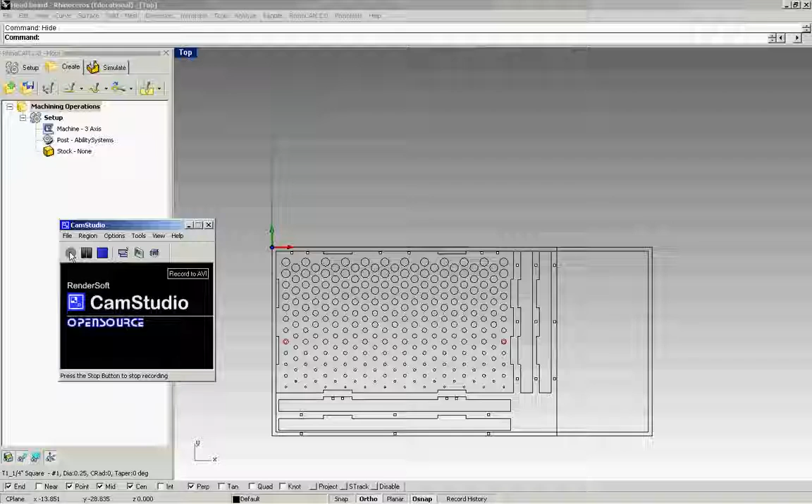Welcome to dFab tutorials. This is RhinoCAM2 and we're finishing up our three-part flip mill. In this segment we are going to finish off our flip mill with some profile cuts.

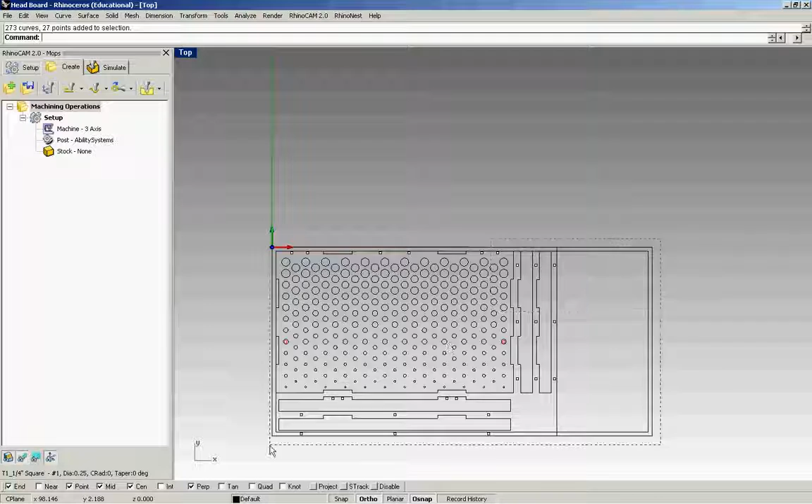So what I've done is I've taken my last piece here and I've created a new file so that I just have this to work with. So remember, we want the bottom left-hand corner of our material on the origin point. And what I've done is I've also added some sides to this so I can create a box from it. And since we've already taken care of the registration marks, I no longer need those.

And you can see that I have other points here as well, and these are going to be drill holes for screwing down my pieces. Just to explain a little bit of the nesting here, what I've done is I've created space in between profile cuts so I can create a frame around them, adding in the screw holes. Since I don't want screw holes on certain pieces, this strategy works best, and that'll prevent the pieces from kind of wiggling around when they're being cut.

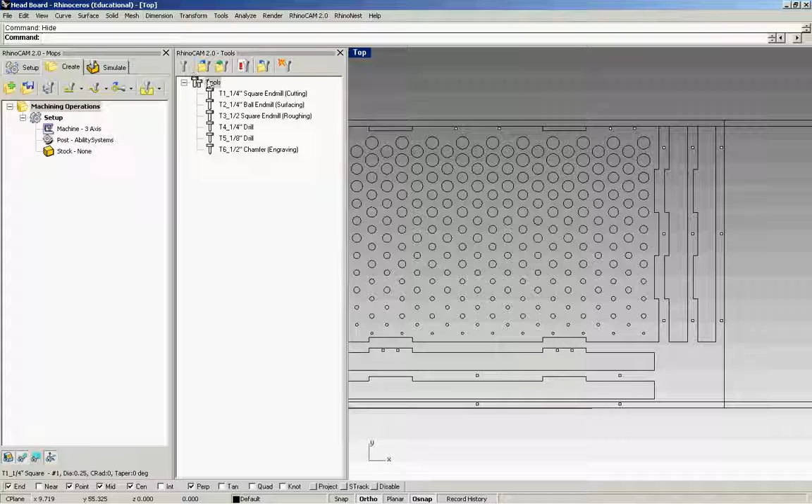So first, our tools are already loaded, and if you need to, go to RhinoCAM2 tool browser and you can load your tools with this icon. The first step I'm going to do is my drill holes. So I want to select all my holes, or my points. Go down to the drill icon and make sure that they are recognized. And again, we're going to use the 1/8 inch drill.

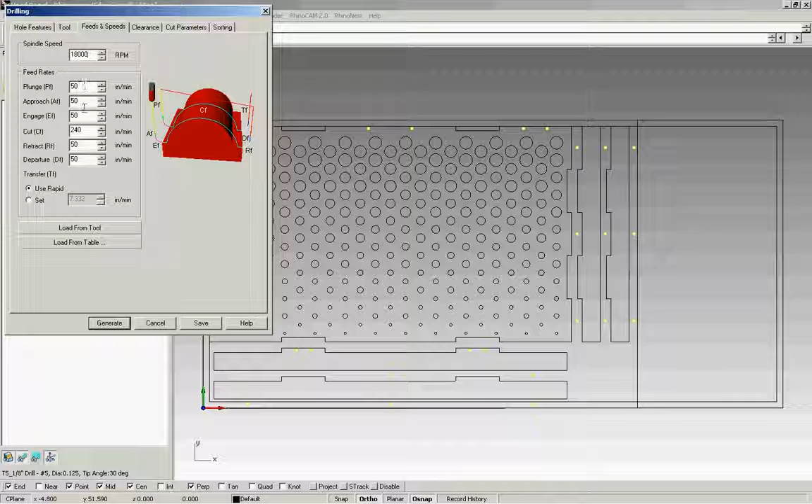And from the previous tutorial, we used 18,000 for RPM, everything else is 50, and the cut feed is 240. The Z value is going to be our material thickness, 0.75 plus a 1/2 inch. So that gives us this number, and we want to make sure clearance plane is checked.

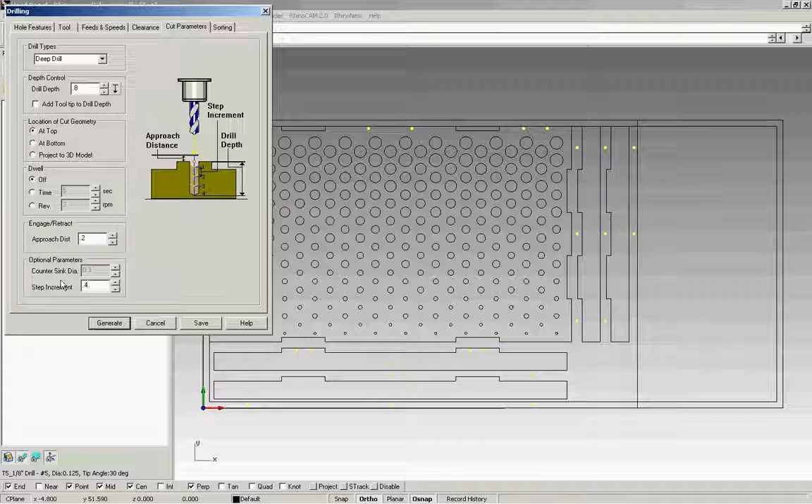For the 1/8 inch drill, I like to use deep drill setting, and we're going all the way through the material, so it's 0.75 plus a little bit extra, 0.05, and that ensures we get a clean hole. Again, approach distance is 0.2, and we're going to cut this in half and do 2 steps. Here I have a lot of points, a lot of holes, so this is going to really help on the sorting. And hit generate. You can see it's somewhat organized.

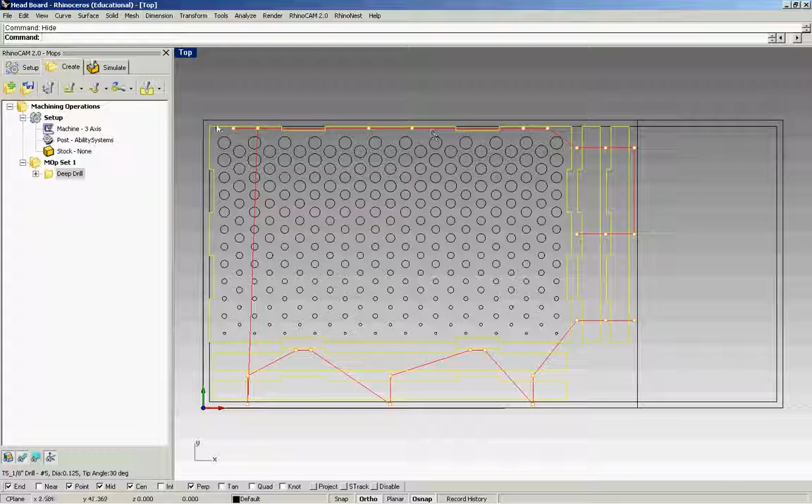Next would be to cut our profiles, first on the inside cuts. This is important because obviously we don't want to cut this outer edge first and then cut what's inside, because we might run the risk of it moving around a little bit. So for that, select your geometry, go back to 2.5 axis, and this time select profiling.

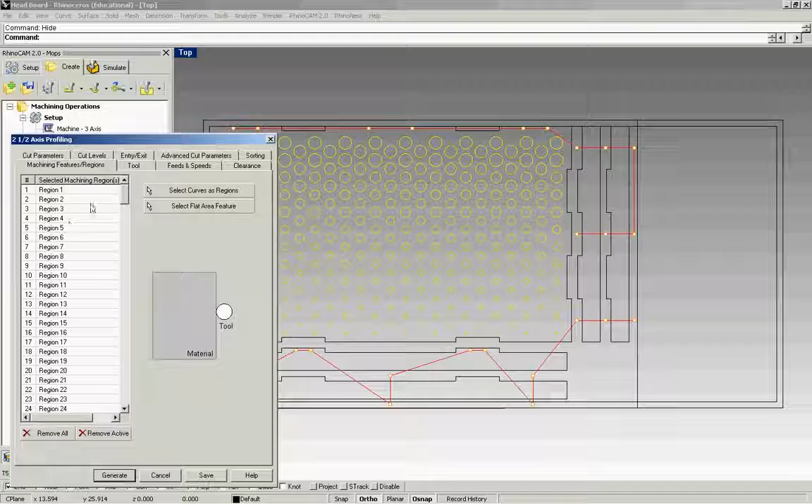Now we're breaking this up into 2 different operations because I have interior cuts, which are the ones highlighted, and then I have exterior cuts, which are the ones on the outside. So first we're going to do the inside cuts, and just make sure you have your regions selected. For this, again, the tool is going to be a 1/4 inch square end mill, and we use this tool for all our profiling.

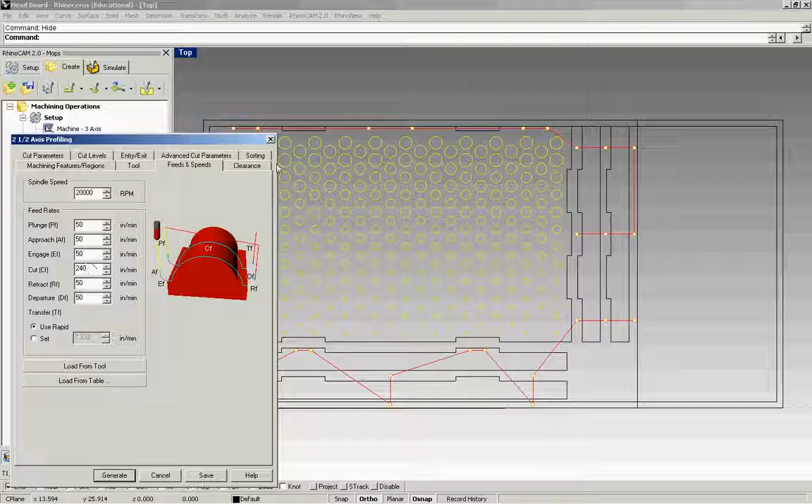We like to run this at 20,000, and everything is 50 except for the cut feed. Now I explained it previously, but again, this cut feed is while the bit is engaged into the material, this is how quickly it's running through it. So we're asking the machine to run the bit 240 inches per minute through the material. Clearance plane should stay the same from the previous setup.

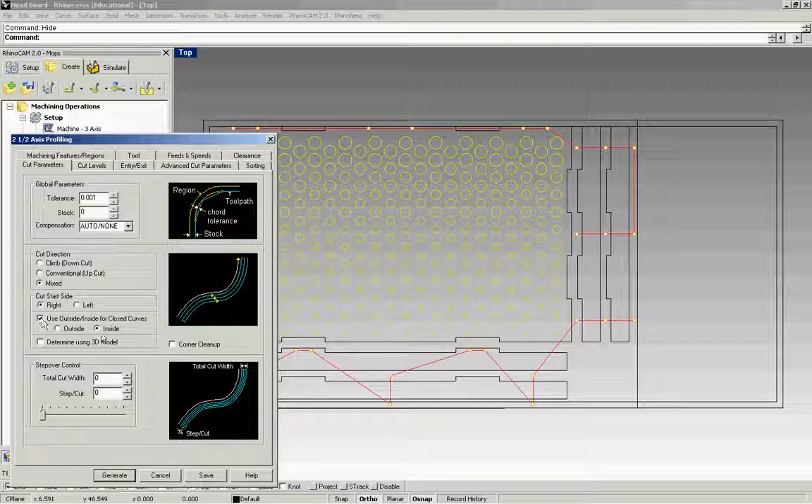In our cut parameters, this tolerance again is important, 1/1000th of an inch, and then our stock is set to 0. And we want a mixed cut direction, and this is important right here, outside inside cuts. We want to make sure that we check this box and bubble inside cuts. Cut levels, we are going all the way through the material. So your first cut, your total cut, is going to be 0.8.

And this will vary. If you're following the flip mill, this would actually be different, just for the fact that there's only 1/8 of an inch of material to cut here. But if you're watching this tutorial to learn how to profile, we're going to treat this as if we're profiling through the whole piece. Sorry if that sounds confusing. It's just a matter of changing our cut depth.

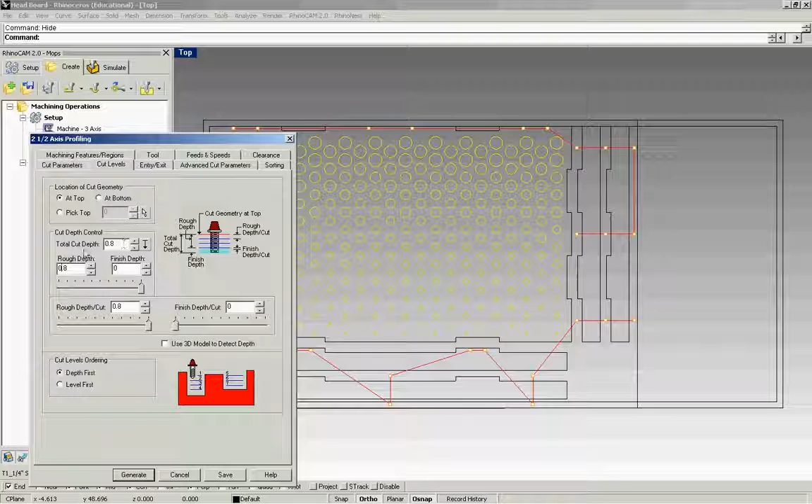So on a normal profiling, you'll want your cut depth to be the material thickness, which we'll do here, plus 0.05. And that's 0.8. And again, our rough depth is 0.375. And this utilizes the sweet spot on the compression bit, giving us a really clean edge. And then for the finishing depth, we like to break this number down a little bit further to ensure longevity of the bit. And just as long as it falls in between 0.1875 and 0.125, we're good to go.

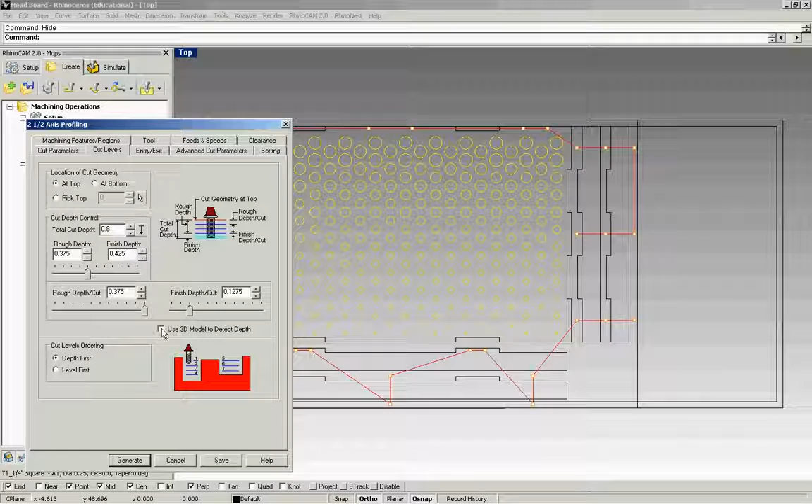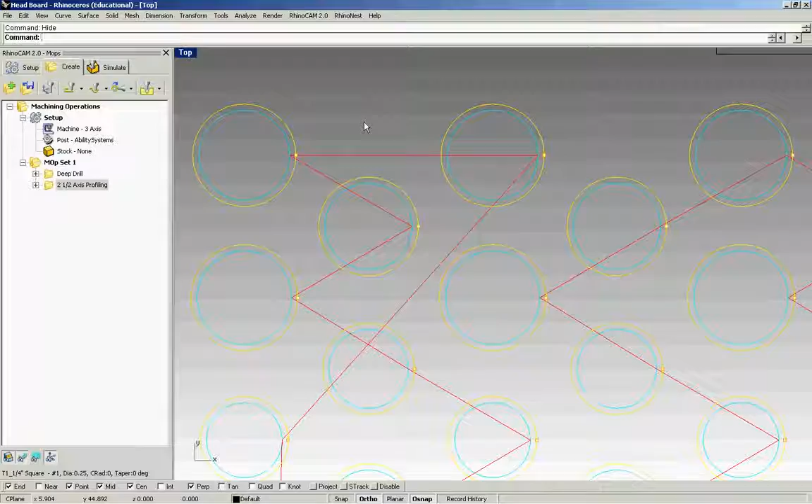So that works there. Make sure this is on depth first. This will save you time. And none on the entry exit. Don't worry about advanced cut parameters, and sorting, you want it on minimum distance. So we'll generate that. And if I zoom in, I see that my blue cut line is on the inside of my yellow geometry, and so we know we're good.

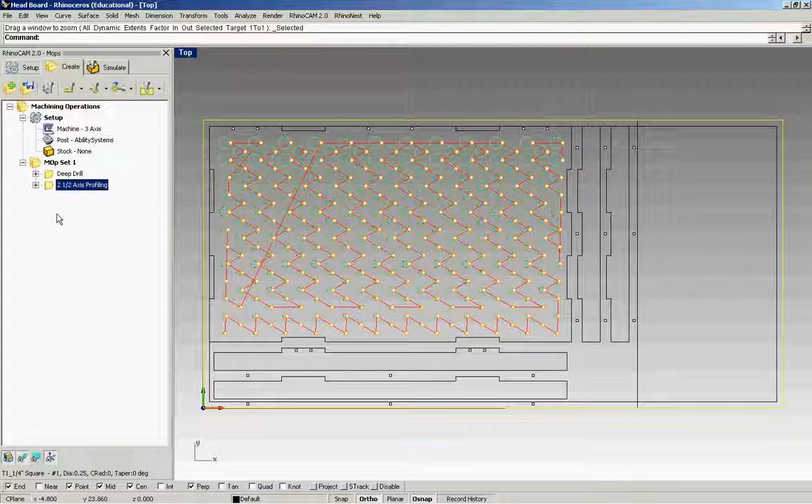And a good practice is just to kind of scan all your pieces to make sure that something weird didn't happen with one of your geometries and it's actually cutting on the wrong side. So I'm going to assume that this is good, so I can move on to my exterior cuts. So my exterior cuts, I can go ahead and select all my pieces, which I've grouped ahead of time. And then I'm going to select this last line out here, and this line is going to lop off this unused portion of material, so I can use that at a later time.

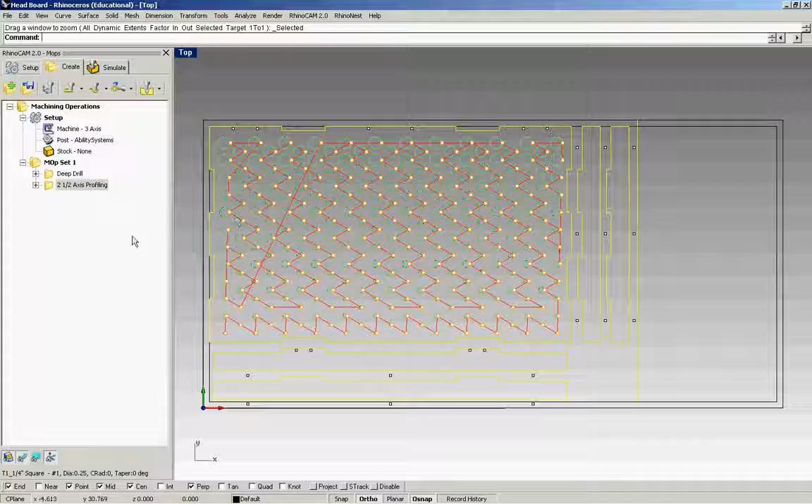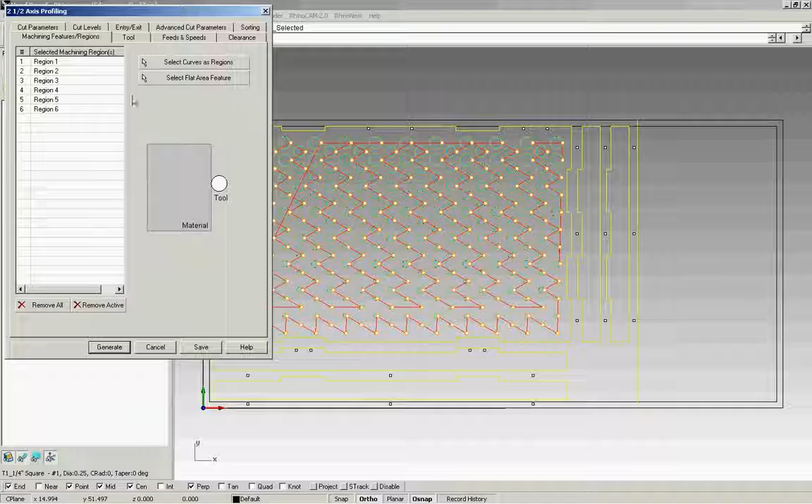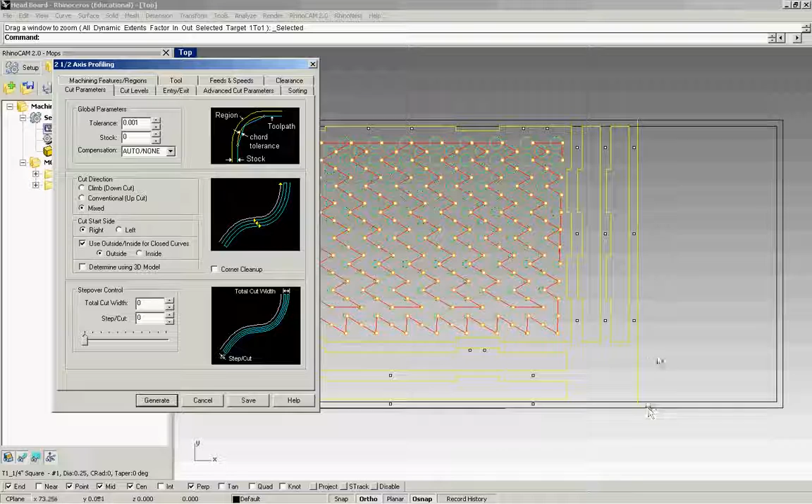Again, we're going to profiling. My regions are set up, and the inside outside cuts, I should say, only work with closed objects. So you've got to make sure that all your geometries are joined and closed together. We go to tools, same tool. Feeds and speeds are all the same. Clearance is the same, and the only thing that changes from the previous setup is we want outside cut. So now the bit's going to be going on the outside of this closed shape. Now, of course, this is not a closed shape on the right, but it really doesn't matter if it's inside or outside.

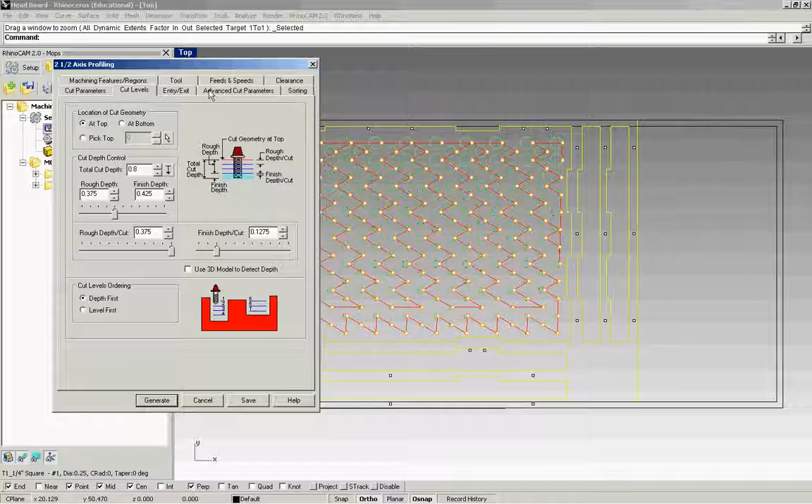Now this one is going to be 0.8 because we have all the material to cut through. And then remember 0.375. And just make sure this falls in the specified range. Depth first is checked, that will make sure that each piece is cut out completely before it moves on to the next. And this will decrease your time a little bit. And none. Don't worry about the advanced cut parameters, and the sorting, again, minimum distance. And hit generate and see what that looks like.

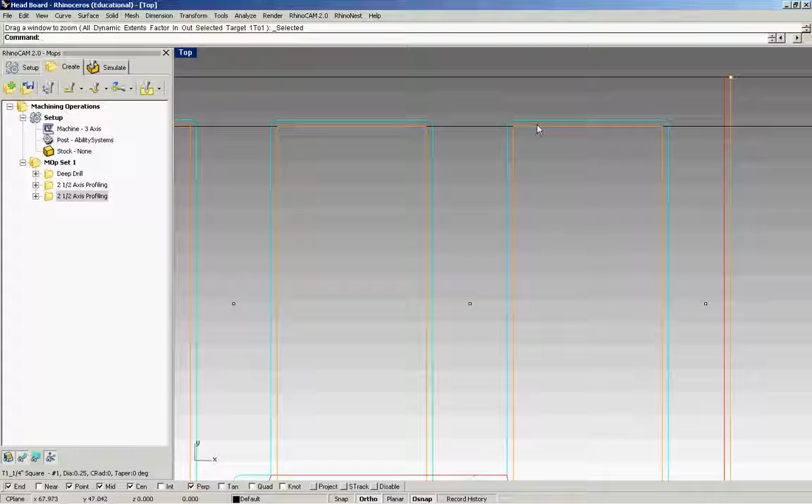So now I see that the blue line is on the outside of my orange geometry. And here on this open curve, the cut line is representative of this red travel line right here. So it doesn't matter if this is on the left or the right. If I wanted to change that, I can simply select that piece of geometry and type in flip. And you'll see that I need to regenerate this folder. When you see a little flower come up on your folders, that means the folder is dirty and you need to regenerate. So I can do that by right-clicking, regenerate, and you'll see that it has flipped.

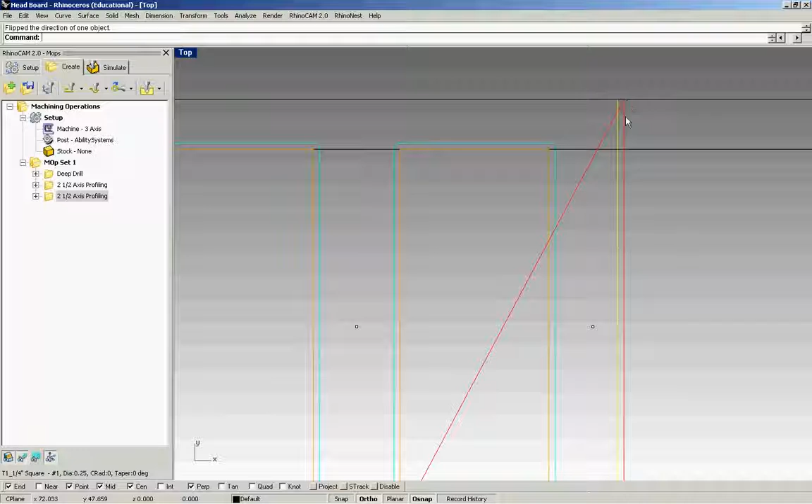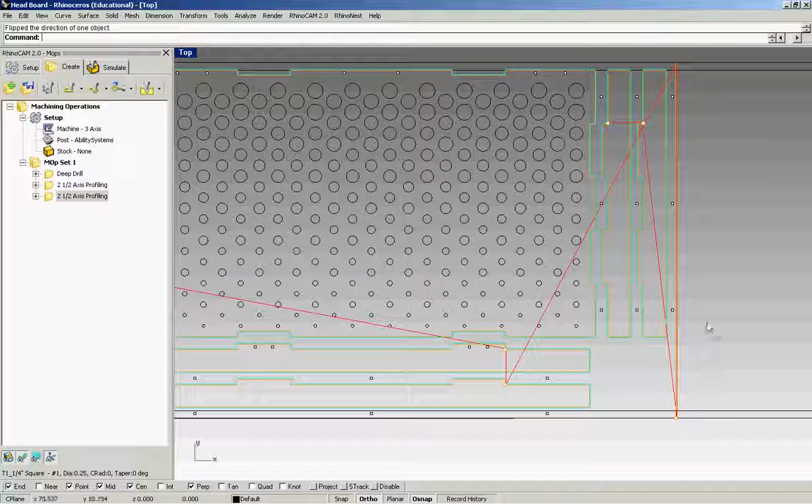Now, just real quick on placing your screws: they need to be at least a ½ inch away from any geometry that you're cutting. This will ensure that the bit misses the screw. And that's if you're using the quarter inch bit, which we're doing here. And this concludes our profiling and the flip mill series.